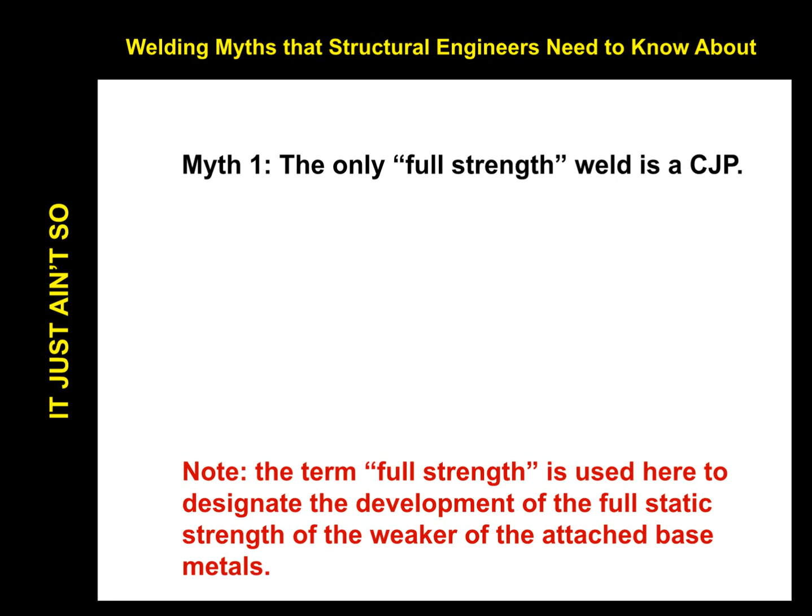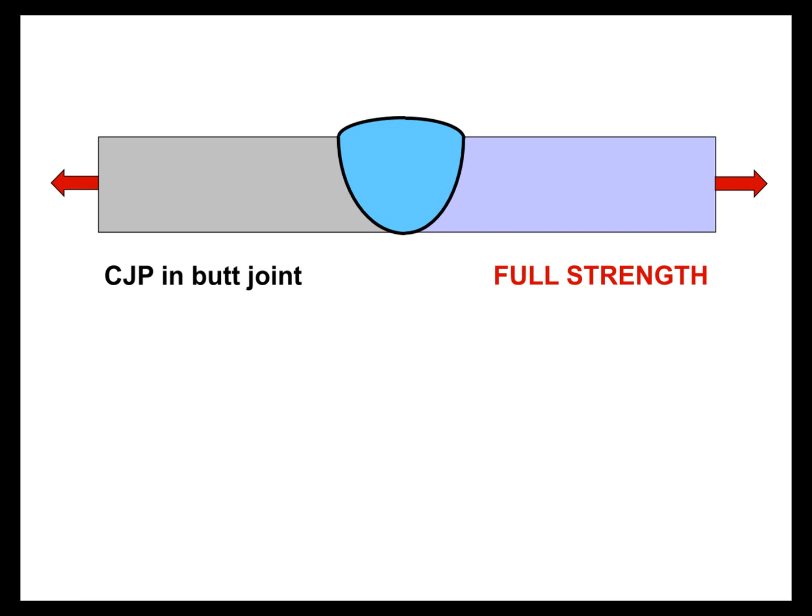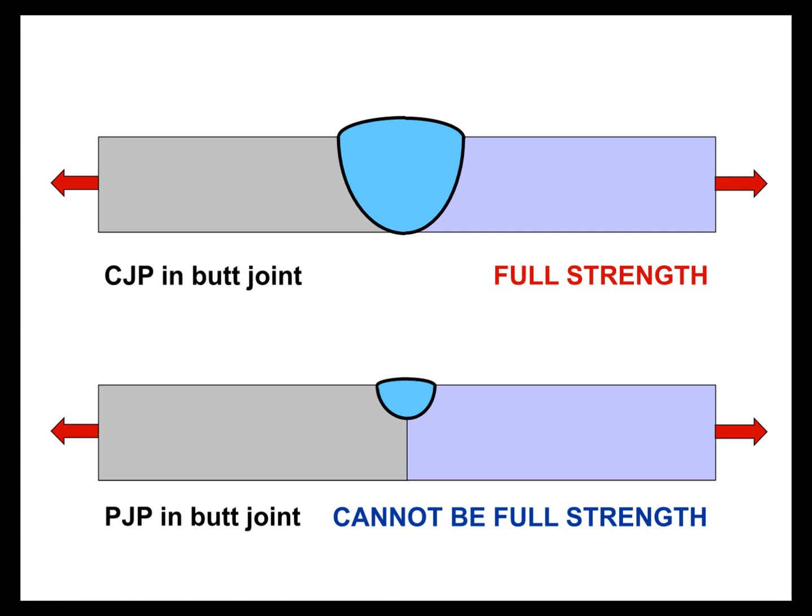And there's a myth. And the myth is that the only way I get a full strength weld is to specify a CJP groove weld. Now let's first look at where that's true. Here we have a butt joint, and if we properly detail the weld, if we use the right filler materials, we get the full strength of the attached material out of that groove weld CJP in a butt joint. Everyone on the call no doubt realizes that if I use a single PJP groove weld in a butt joint, I will never be able to achieve the full strength of the connected material.

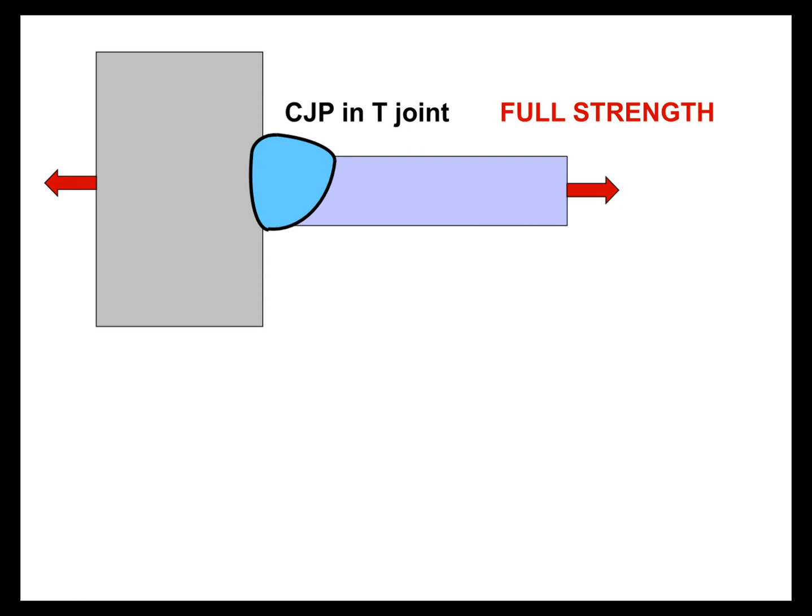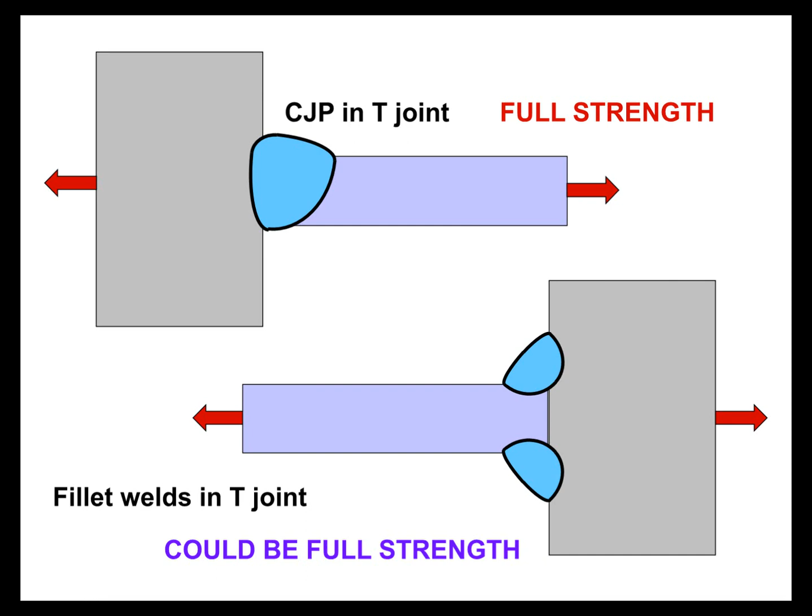Let's switch from butt joints to T-joints. A CJP in a T-joint gives me full strength of the attached material. However, I could replace the CJP groove weld with properly sized fillet welds. And if the fillet weld sizing is proper, I can develop the full strength of the attached material through this fillet welded connection. So here's the first example of a violation of a myth. It is possible in a T-joint to develop the full strength of the attached material using properly sized fillet welds.

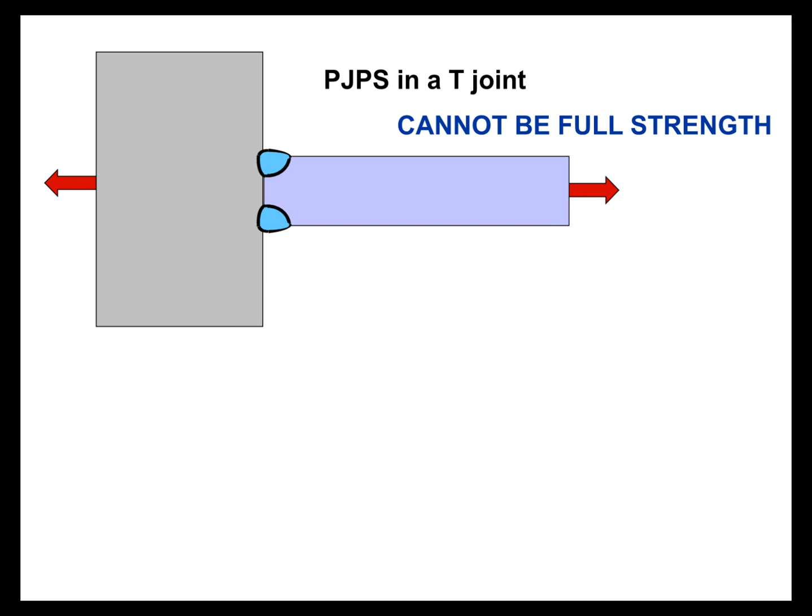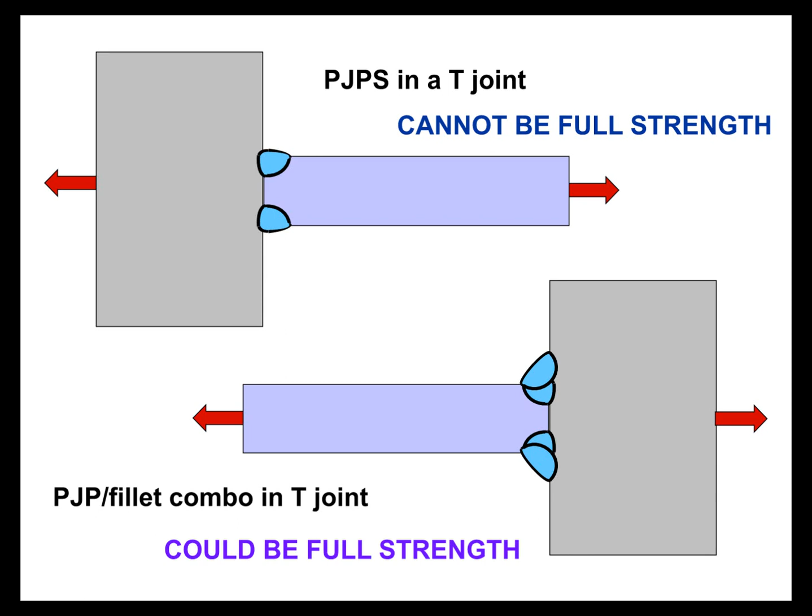Let's go to PJP groove welds and stick with the same T-joint. We can never develop, even with double-sided PJPs, let me make sure I'm clear on that, we can never develop with double-sided PJP groove welds the full strength of the connected material if that's the only weld we use. However, we could add to a PJP groove weld a properly sized fillet weld and duplicate the strength of the attached material. Now in this case we are looking at T-joints, but we could also be looking at corner joints. And as I go to corner joints, I have the same situation.